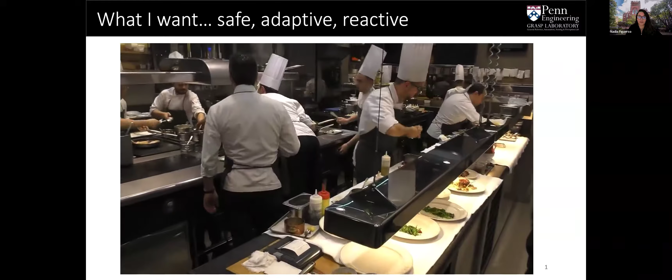If you can see, this is a very busy kitchen of a Michelin star restaurant where they're moving around, sharing workspace, getting in the way of each other, and everything still kind of moves fluidly. There's a lot of interaction.

Some people touch each other, some don't. Some try to avoid colliding. All of this processing is done in real time, it has to be done really fast. So if we want robots to be deployed in these types of scenarios, we need to think about how to make them safe, adaptive, and reactive, with that kind of real-time performance.

The other task or application that I'm really interested in is making robots that are actually useful for humans, physically useful.

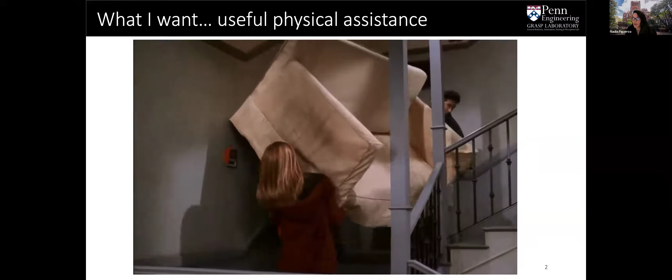I'm pretty sure some of the millennials know about this episode of Friends where they're trying to manipulate, co-manipulate this couch up a set of stairs. I didn't want to put the audio, but as you can see, they fail, but they try.

Even with humans, this task is very difficult. There has to be a lot of intention detection, figuring out what your partner wants when you're doing this collaborative task, when you have this limited perception. These are the problems that I'm thinking about all the time: how can we make robots have these types of capabilities to physically assist humans in useful tasks?

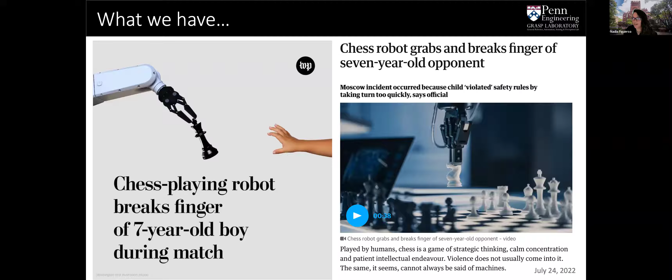But what we really have right now deployed are robots injuring humans. We see several articles online of a robot breaking the finger of a 7-year-old boy while playing a chess match, or robots severely injuring or killing a human in a factory when it's supposed to be in a very structured environment. And there are multiple of these.

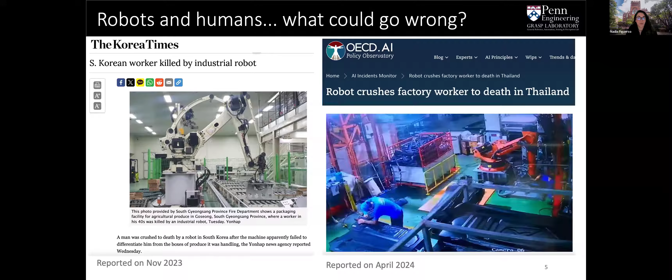So issues start coming up as time goes by, as people start deploying robots in human-centric environments, even in very structured ones, like a factory where there's supposed to be a lot of safety guarantees or rules. So that's exactly what we focus on in my lab.

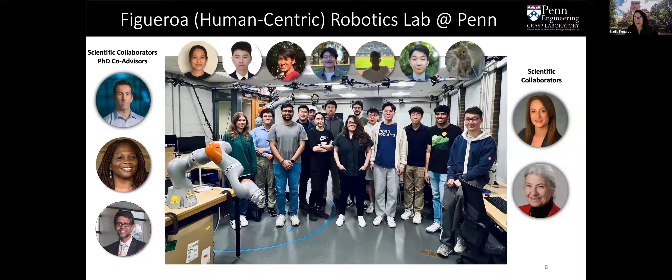In my lab, we want to do human-centric robot learning and control. Anything that the robot does in terms of control, how it learns, should always think about the human, that the human is going to be there. So how do we control and how do we learn for humans? The three things we're really interested in is fluid interaction.

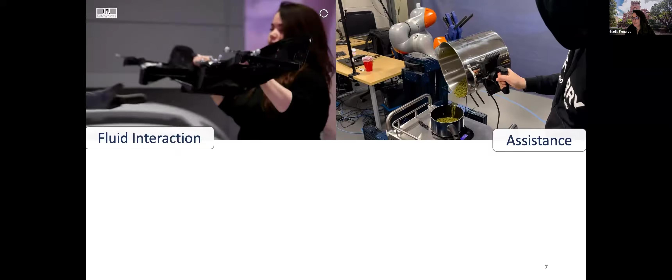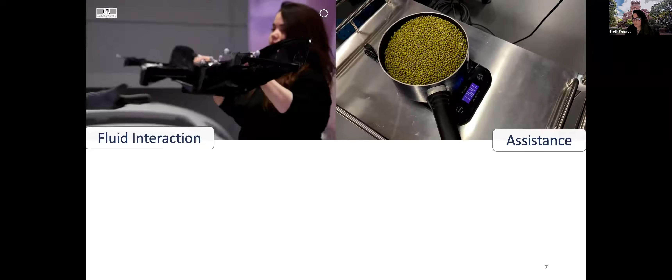Developing controllers or learned policies for robots that will fluidly interact with humans, like in this video where I'm handing over a large heavy object to two arms, being able to physically assist humans in everyday tasks, figuring out the intent, the collaborative manipulation intention of the human, and being able to provide the necessary force, the assist that's needed, applying a force, predicting what the human wants, and doing all of that in real time to perform the task with the human without making it more clunky or difficult.

And then, of course, we want to allow robots to be able to swiftly adapt to changes in the environment, changes in the task, or even changes in the user preferences.

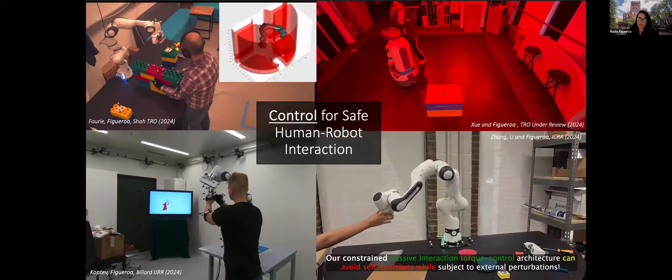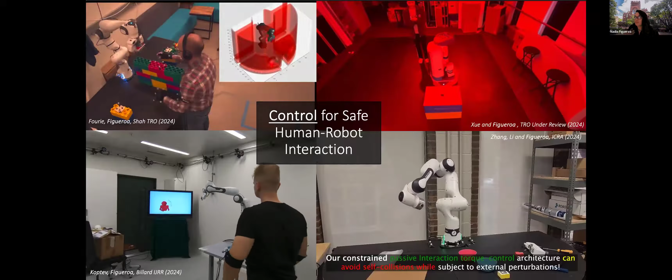Here on the left as well, directly avoiding colliding with a human, a complex high-dimensional articulated obstacle, or even going more at the low level, ensuring that if the human physically perturbs a robot, we ensure it doesn't go into self-collisions or joint limits while providing passive and compliant behavior. Those are some things I'll talk about more in depth later. I just wanted to give an overview of what we do.

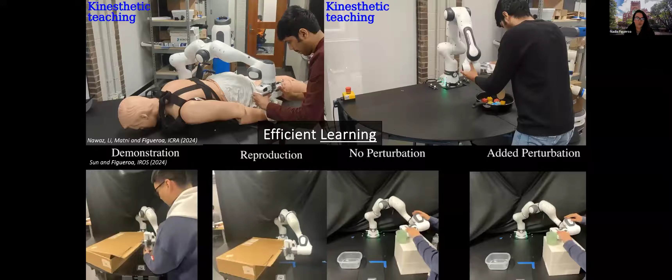And then, of course, there's the efficient learning part. From my point of view, what we want is really robots that can learn quickly, or adapt quickly from a human preference or a human demonstration with as little amount of data as we need to query from the human.

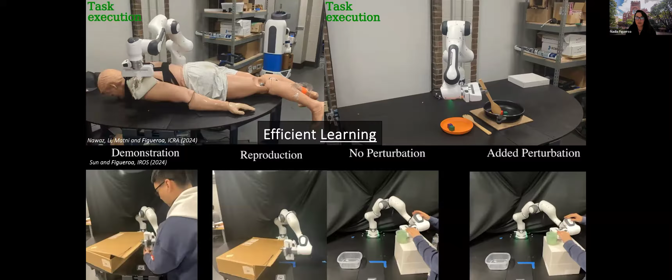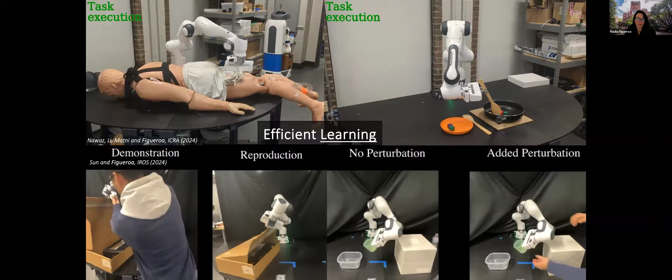My idea or intuition is that we don't want humans to provide 100 demonstrations all the time for different tasks. We would want them to provide the minimal number of demonstrations possible, and then have the robots squeeze as much information from that demonstration in order to perform the task in a stable manner, while being able to allow perturbations as you see in these videos. All of these videos were trained with one or a couple of demonstrations.

So this was kind of like the overview, and now I'm going to talk about how we do this. Before that, I want to take a little step back and really understand why our current robots, or the way that we control robots, from my point of view, is not thinking about the human at all. It's not human-centric robot control.

And that's why we have all of these incidents all the time, simply because the way we're controlling, our control pipeline, is flawed, has basically the incorrect objectives and requirements for robots that are actually going to be deployed in the real world with humans around them. So I'm just going to lay out what I call the traditional robot control pipeline, which I've had some backlash for from some people, but I'm fine. I think this is the traditional way of doing things.

You have some form of task specification, whichever you favor, at a high level. So you have some high level decision of what you want the robot to do. Then that high level planner gives, for example, a goal and maybe some constraints, X star and some constraints beta, to a motion planner that then creates the trajectory you want the robot to follow.

And then subject to some objective that you define, that is fed to a low-level controller that tries to track that trajectory. We normally only have feedback at this lower level, at the low-level control, where we send directly the torque inputs or velocity or however that robot is controlled, and we care about external perturbations or disturbances mostly at this physical robot level. But all of these other layers are somewhat offline.

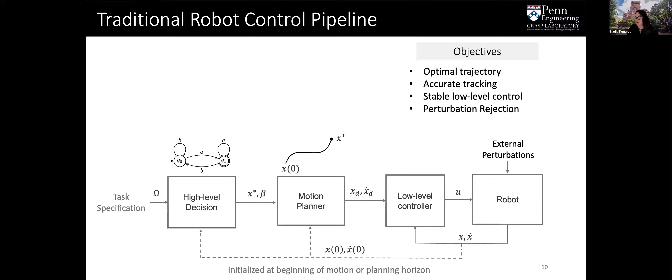So that's kind of like the traditional robot control pipeline. If we think about the objectives of this pipeline, they are generating an optimal trajectory, accurately tracking that trajectory as best as possible, and remaining stable or keeping stability of the robot at the low level control, and obviously being able to reject perturbations.

So if we think about these objectives, the assumptions of whatever system is going to be deployed with this type of pipeline is that if you deploy a robot with this type of control architecture, you're assuming that the humans will follow any safety rules that you tell them to follow. You're assuming that the human is not going to physically perturb the robot. And you're assuming somewhat that you have a quasi-static or fixed environment that you use to generate those high-level decisions and motion planning layer here.

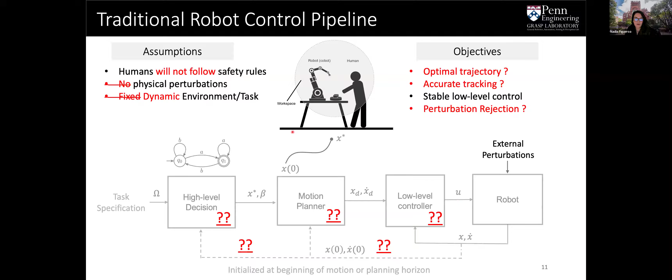So what should change? What should we do in order to make the robots actually follow these assumptions during their deployment? And so what should our control objectives be for physical human robot interaction? That's the first question. And how do we achieve them? So those are the two things that I'm going to answer in the remaining time of this lecture.

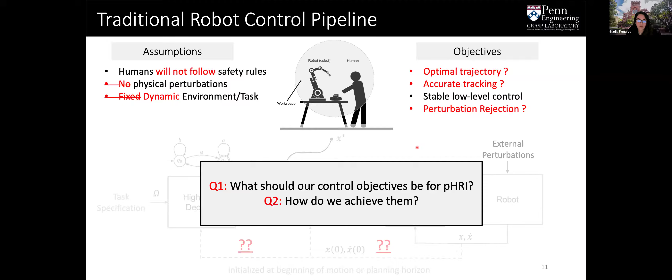So first of all, assumptions - I said humans will not follow safety rules. So what are the objectives? Even if the robot is tasked to just do a pick and place task, it should still have a reactive low-level controller that avoids the human or any agent that's coming into its environment.

We want robots to be able to handle human perturbations, because these perturbations can be either adversarial, like you see in the video here, where I'm just kind of pushing the robot around to stop it from achieving its task, which is releasing the block in the target.

But perturbations can also be intentional. It could be the case that the robot is performing a task and the human just wants to correct it quickly and say, no, don't grab this block, grab this other block, or don't polish this surface over here. And our robot should be able to allow the human to just come in, grab the robot and move it. And then the robot kind of adapts or infers what the human actually is doing, or wants, or is saying to change in the robot's task, without having a very difficult or complex layered architecture that deals with all of that.

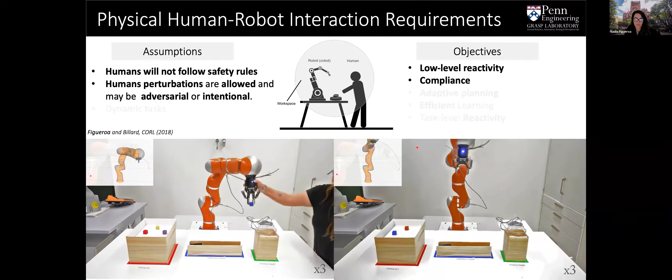This should be kind of natural in the way that we're controlling the robots. So for that, obviously, we need compliance. We need the robots to be compliant. And then the next one is kind of like dynamic tasks.

If the tasks are going to be inherently dynamic, then our objective is adaptive planning, not optimal planning. So it could be both, but from my point of view, the objective is more on the adaptation part than on giving an optimal trajectory in terms of time critical situations.

Obviously that's where you would need something like that. But in a lot of these adaptive tasks, what's more interesting is the adaptation to changes in the states of the world, of the human, and of the robot itself.

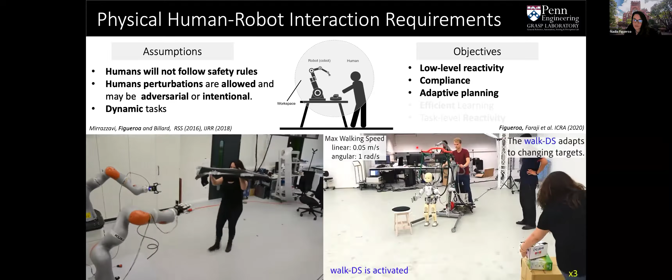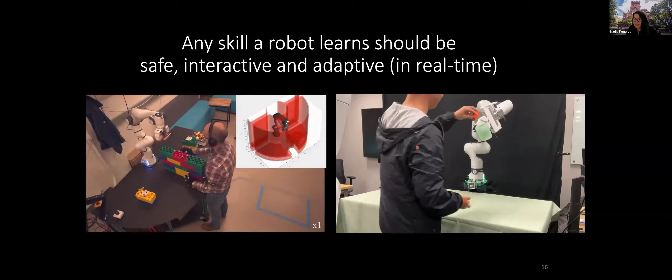So here I show some videos of what I mean by this type of adaptation. Basically, my main thesis is that any skill a robot learns should be safe, interactive, and adaptive in real time.

So how do we achieve that? That's our next step. Going back to this robot control pipeline, the only way we can really achieve this is if we start adding feedback into the higher level layers of our traditional control pipeline.

For example, in the motion planning layer, rather than generating a time-indexed optimal trajectory, what we need is more of a reactive feedback controller, a motion planner that takes the current state of the robot and is always adapting to changes in the environment.

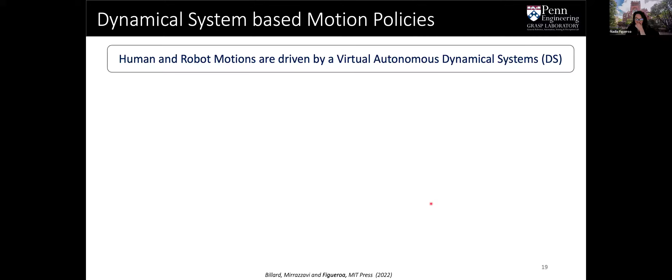To achieve this, this is the first chunk of theory or techniques we use. We assume that the human and robot motions are driven by a virtual autonomous dynamical system. So rather than representing the policy or motion generator as a function f of x that just gives you the next desired state or a trajectory, we define the motion of the robot as a dynamical system like this.

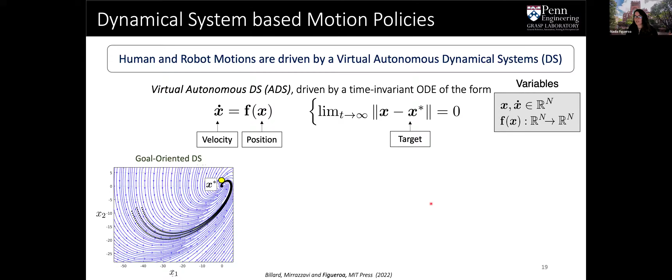Where x is the position, x dot is the velocity, and f of x is this vector field or flow that tells us, from everywhere in the state space, how the robot should move to follow that trajectory or reach that goal.

What's cool about this is if we formulate our motion policies this way, we can use control theory to ensure stability and convergence. We can apply Lyapunov theory and impose constraints on the parameters of this function f of x so these vector fields have no local minima, no spurious attractors, and no divergences.

So it will always bring you back to the trajectory or to the distribution of the data used to learn these dynamical systems. You can also enforce safety. Once you have a dynamical system, you can modulate it, you can reshape it.

So you can enforce safety through this boundary-based invariance idea, similar to control barrier functions. You can add a control barrier function on your state space, and then start modulating the flow or encapsulating the flow of these dynamics to ensure safety or virtual boundaries in the state space.

And of course, we can also apply even more advanced nonlinear control techniques like contraction theory, which we're exploring currently in my lab, to have even more expressive motion policies, like limit cycles, that don't necessarily follow or aren't expressible with a typical quadratic Lyapunov function. So that's one cool thing.

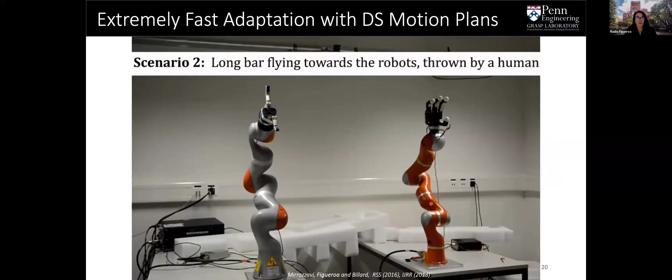But the other cool thing is that because it's just a very simple parametric function, we can do extremely fast adaptation with these types of motion policies. This was a work from my PhD with my colleague and dear friend, Sina Mirrazavi.

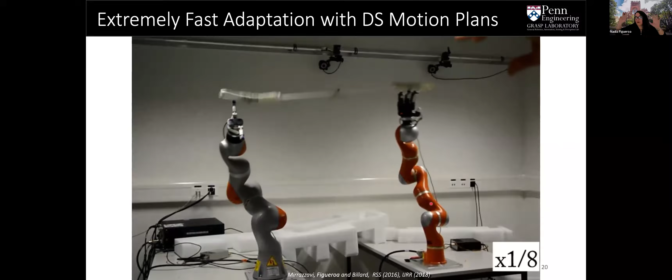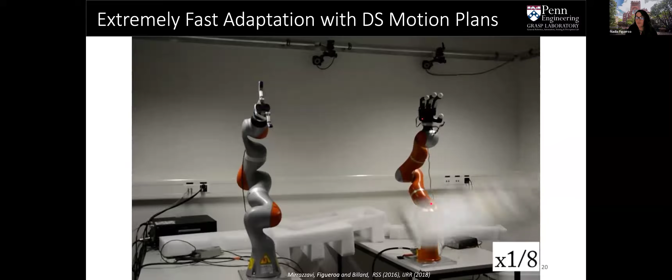In this case, the video is slowed down 8 times because we can throw this bar to the two arms, and what's driving the motion of the two arms is a dynamical system we formulated to track the position and velocity of the grasping points of these arms. So this shows that if we can learn or parameterize these motion policies with these guarantees, we can have really cool and reactive behavior at the level of a human or even superhuman level.

So it's kind of like a negative velocity feedback error. This allows, depending on how we formulate this damping matrix, the human to perturb the robot in different directions, orthogonal directions to the motion, or in any direction, depending on how we do it. But obviously, if we don't have a compliant robot, this will be a bit more difficult to do.

Not impossible though. We can have force torque sensors, tactile sensors put on the robot so that we can detect when there's a touch or contact, and then we can basically do this same type of behavior, but now with a non-torque control robot.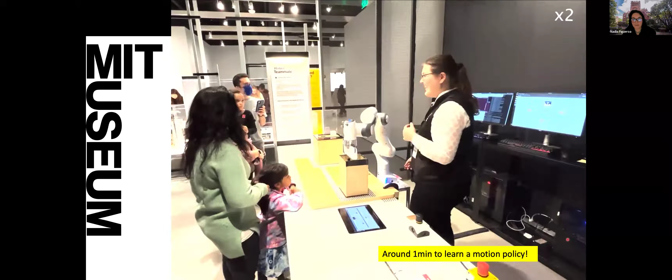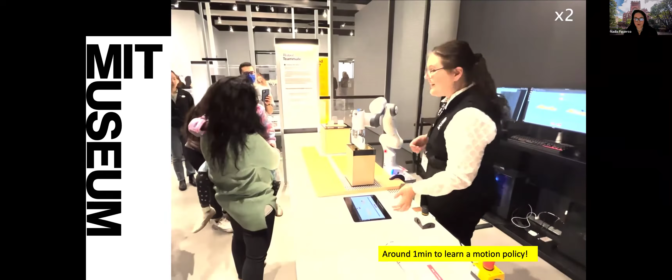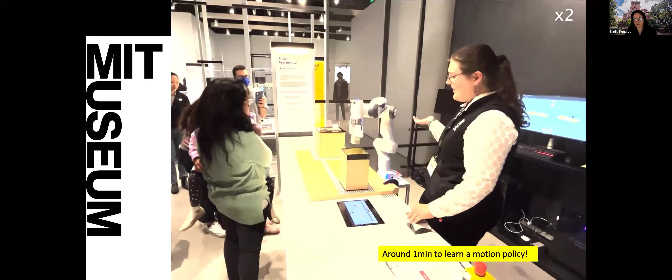To show how easy it is to teach these systems and deploy them, we have this method working in the MIT Museum. Here, one of the museum facilitators showed a museum goer how to teach the robot to do the task. While she's explaining what's going on, the motion is learned—in this case, in about 1 minute. Once learned, you can see that humans can interact very easily.

This ensures safety and compliance to physical perturbations, and also to the safety constraints. Now, one thing I glossed over a little in the previous slides is how to learn this mixture—how to figure out how many of these linear systems you need.

And we get some Gaussians that from the machine learning perspective seem okay because you have nice data coverage with a minimal number of Gaussians. But from our assumption that each Gaussian should represent a linear system, it doesn't work, because you end up combining trajectories that are actually moving in opposite directions. And then you end up with a dynamical system that doesn't perform well. It will converge because it's learning your system matrices with these constraints, but it will not be able to reproduce your trajectory accurately.

Very fast, so that we can now do incremental learning. In this case, for example, my student Sunan showed three demonstrations. We had three demonstrations, we learned the dynamical system, and this is running in real time, actually, this video. Then you can see the dynamical system was learned, and now we have the reproductions here, and he will now show that reproduction.

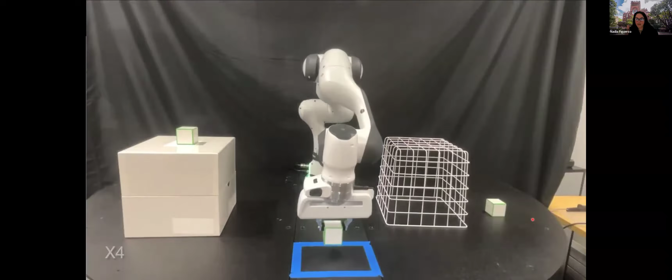And because it's a parametric model, if you add more data or more batches, we also have a very simple way of adding those trajectories to the previously learned dynamical system, and figuring out how many more parameters we actually need to add. And all of this is learned in real time.

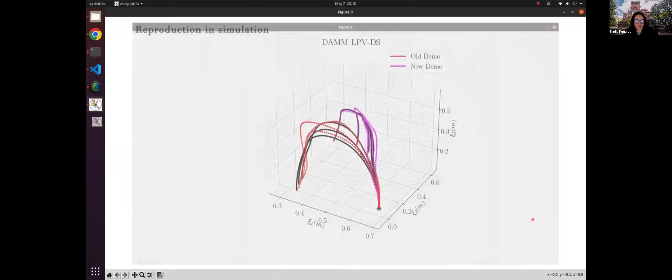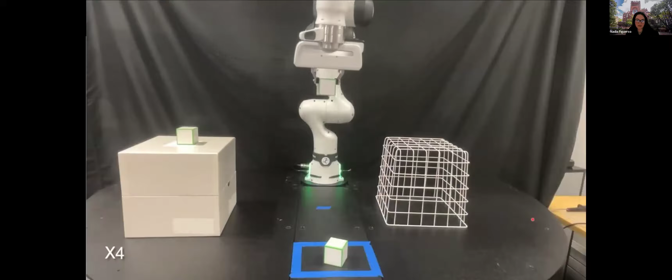So this video is just a screen recording of my student's desktop. As you can see, we do the reproduction in simulation, and then now the robot is capable of performing that new task. All of this is within a single motion policy, so we can incrementally build more complex trajectories and motion policies.

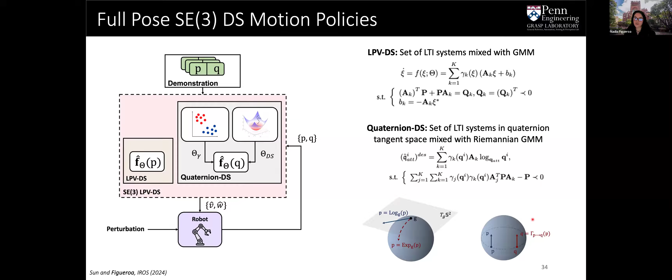Of course, one of the things is that all of the variables I have been using up until now are on X, so assuming Euclidean space. So we also have a new work that extends this idea of linear parameter varying dynamical systems, but now at the quaternion space. And then we combine it to have a full SE3 linear parameter varying dynamical system with a Gaussian mixture model that is in the Riemannian space of the quaternion, combined with position space.

And now we can also learn from a single demonstration the full pose dynamical system motion policies, as you see in this video. Here we can see a typical pouring task.

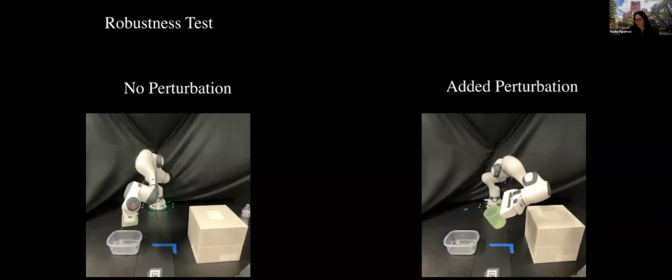So on the left is just without any perturbations. On the right, you can see that we can perturb it, but because it learned the flow in both position and orientation, it's coupled, so if we perturb it, it'll also correct its orientation. As you can see, that's a very useful task to have, and we trust it so much that we're actually pouring real water into the cup.

So of course, that's one way of learning these dynamical systems. We're also exploring different techniques, like a more virtual control approach, where for cyclical tasks, we use a neural ODE with a couple of demonstrations of this kind of cyclical, periodic task. We fit the neural ODE. One of the things about the neural ODE is that it encapsulates very complex dynamics nicely, but it still has that issue of spurious attractors and potential divergences. So what we did here was take more of a virtual control approach, and say, okay, we stabilize our neural ODE, which is unstable.

It's very accurate, very nicely representing expressive trajectories, but it will go into some weird spurious attractors if perturbed. So what we do is add this virtual control, which is very simple—this error. This virtual control is driven by a Lyapunov function on the tracking error of the trajectory, not with respect to a target or a global attractor, but with respect to your actual trajectory. So essentially, if you're perturbed, this virtual control will bring you back to that limit cycle or trajectory that was learned with the neural ODE.

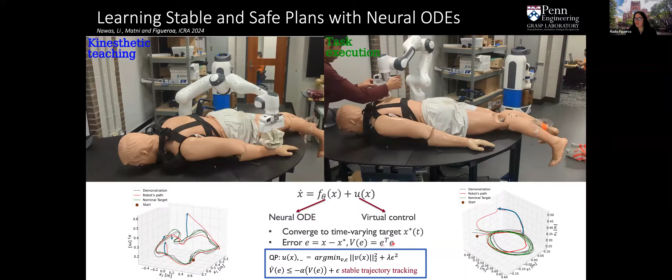And of course, because it's a quadratic program, we can add collision avoidance with control barrier functions. So it's very easy to start adding constraints and ensure all of these different guarantees.

We've also explored, in collaboration with colleagues from Bosch and Denmark, using contraction theory in the latent space—neural contractive dynamical systems. These are SE3 dynamical systems that we pass through an encoder, and in that latent space we ensure we have a contractive dynamical system following very simple contraction constraints, and then we deploy it. So we show contraction even in this latent space.

In that paper, we also have examples of how this works for learning motions of a full human, more than 16 degrees of freedom, also.

So all of this is cool, right? I showed you multiple ways how we go about learning these feedback motion policies in order to very efficiently get that adaptivity that we want inherent in our motion policies. But then, of course, there's one other component: these policies are learned on static data. So you give a demonstration, and it shapes your dynamical system following that demonstration, and it will only be able to perform that.

If suddenly your demonstration or task was all about going to a specific via point, or grabbing an object, or avoiding some part of the workspace, and those geometric constraints start changing, then you end up having to learn a new dynamical system—which is that whole idea of multimodal learning trajectories from different viewpoints, so that they can be generalizable and transferable.

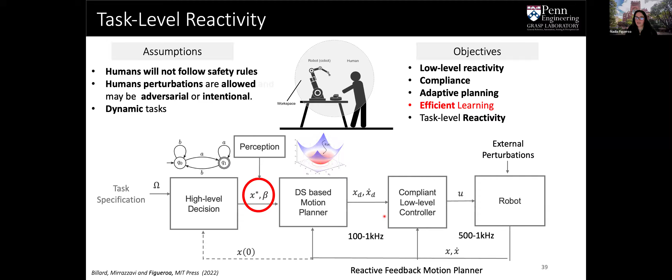So instead of having to give another trajectory from a different perspective or environment that represents the same task, and trying to learn this generalizable policy, we go about it a different way. We say, okay, we know from the perception system what these task constraints are—they can be frames, for example, SE3 frames that represent an object in the workspace, the target, the points of grasping an object, passing through a tunnel. All of these are objects that can be represented by frames—geometric constraints, or even directions of approaching. So we said, if all these constraints can be expressed as geometric constraints, couldn't we add that into our motion policy, so that when something changes in the environment, our policies or dynamical systems morph with the geometric change, instead of having to give another demonstration? And that's exactly what we did.

We presented this work last year at CoRL. We call it elastic dynamical systems. The whole idea is very simple. Here I show you an original policy that was learned from a single demonstration, shown with the Gaussians and the vector flow.

Now we add these green blocks, which are our geometric task constraints—this is where you pick, this is where you place, and maybe here it's a tunnel or a via point. If those geometric constraints change, then in order to morph our dynamical system, all we need to do is morph those parameters to achieve or be close to the geometric constraints we know are inherent in the task. So we manipulate that Gaussian mixture model—we created an elastic GMM, where the parameters of this mixing function of our dynamical system policy are the typical prior, mean, and covariance of the Gaussians, plus the geometric constraints. We added joints to connect all of these Gaussians, so now we have a kinematic chain of Gaussians.

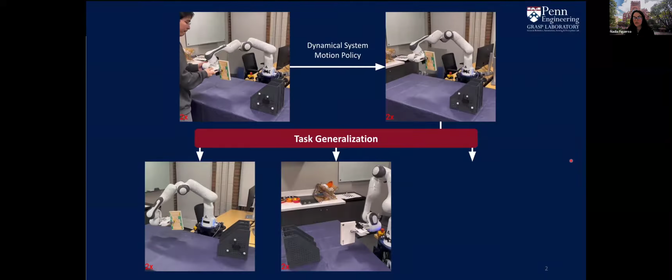So I can show you a video of how this works here. For example, here we give one demonstration. We show with that LPVDS framework, the original one, and then it deploys a task. And then now we change the orientation and position of the bookshelf in multiple ways, and you can see that what this method now adapts, right? What it's doing is reshaping or morphing the parameters of your dynamical system such that it now achieves the task constraints that you want.

So the next step was, can we do this adaptation in real time for motion policies, for task constraints that are changing in real time? So that's the latest work that we have right now, which we call EMP, or elastic motion policies.

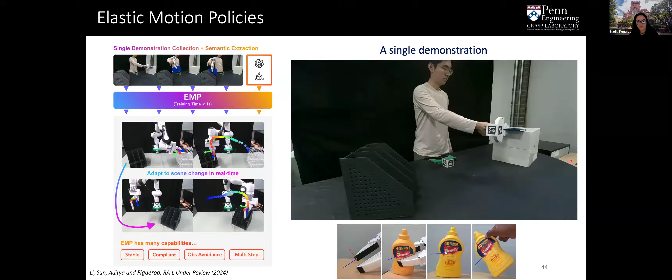So basically from a single demonstration or collection, here now we start introducing more perception, right? So we track the UMI gripper, we get the demonstrations directly from the human. We also use a large vision-based model to tell us the segmentation points, and we track the objects of interest. Initially we were doing everything with a motion capture system, and now we're using an actual perception system. Because of our advancements computationally, we can adapt these, or morph these elastic dynamical systems, in real time.

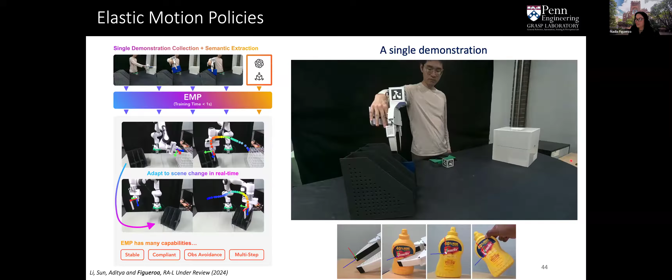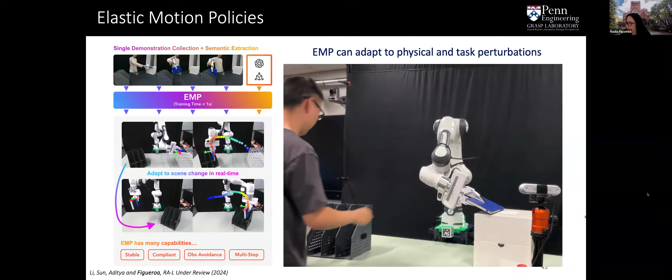As you can see here, the EMP can adapt to physical perturbations, as we've shown before. It performs the tasks nicely. So here we're perturbing it, we bring it back to another state, and then we change in real time. We're just changing the target, and it immediately recomputes your motion policy without having to give any new data, right? The whole idea is that the policy itself already has some notion of what the task constraint is, which in this case is the bookshelf pose that we're tracking using foundation pose. As you can see, the RGBD camera there, and the robot is capable of performing this, is capable to adapt to them and perform this very nicely.

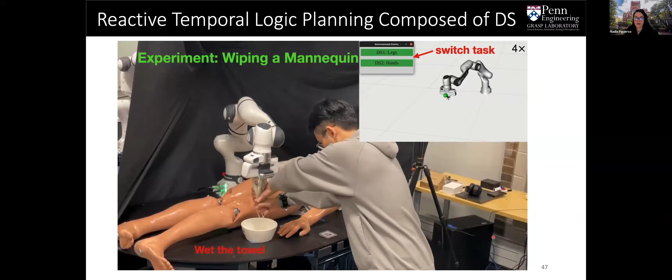So we have other things, of course. The idea is all of these tasks that I've showed you are kind of like single tasks, which you can think of as action primitives or policies that are expressive enough but are not multi-step long horizon tasks. But because each of our dynamical systems have convergence and stability guarantees, we can easily fit them into a high-level planner, for example, linear temporal logic, or this is a work that we just presented at IROS, reactive temporal logic planning, where what we're doing is composing these dynamical systems, integrating with perception, and then being able to switch between systems depending on the state of the world or the state of the human, and the human comes in and starts changing things up, right?

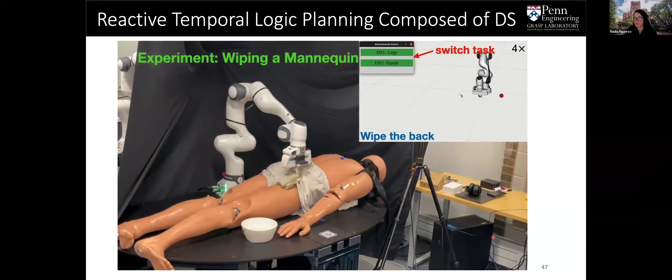Start changing the task. So here in this case, we have that, and then we can also, here is another example of just having a very nice composition of motion policies.

So one thing that I haven't mentioned, up until now it's all about learning, right? So how do we ensure then safety? I've mentioned this before. So learning, and then we can also even feedback at the high level decision, which is what this elastic framework is doing, is changing the target and changing the task constraints of our motion policy so that it's adaptive. So in this case, what we're doing is also feeding back some states, some information about the state to the high level decision maker. In this case, a very simple automata that we did for EMP, but then we're also exploring LTL in order to do that switching, to figure out what's the next dynamical system to use. But if we have this feedback at all these levels, then that's exactly how we can ensure the reactivity at the task level, at the motion level, and even at the low level, right?

So in terms of safety, I'm going to go super quickly over these. I mentioned this before.

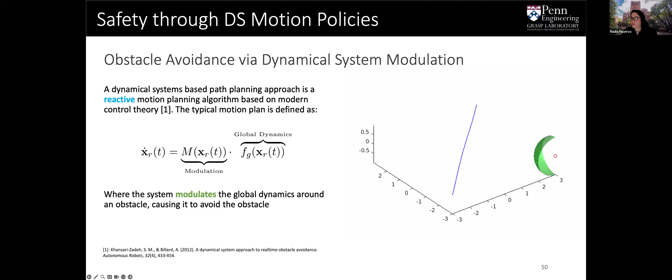When you have a dynamical system, it's very easy to modulate it. If you already have learned a function f of x, and you have some representation of the obstacle, you need a continuously differentiable function that represents your obstacle. You can essentially reshape your velocities, reshape your vector field. This type of work is inspired by harmonic potential functions from artificial potential functions, but in this case with constraints, like guarantees of convergence, and at least not having the least number of local minima as possible, which is all of these reactive methods actually do.

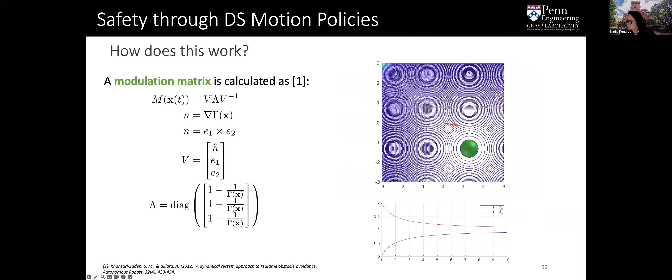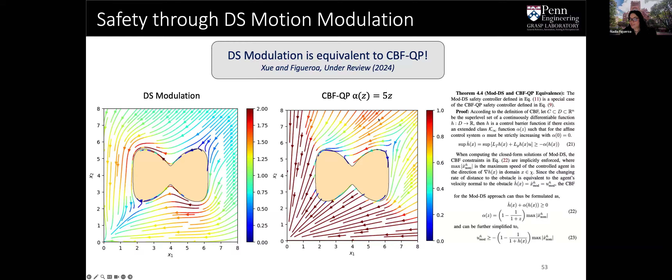One interesting thing is that this type of boundary modulation, of vector field modulation, is actually very similar or equivalent to imposing a barrier function, which is something we've shown in a recent work from one of my PhD students: if this modulation, where we construct a matrix that locally reshapes your vector field such that it follows the border or boundary of your system, it's essentially performing the same thing that a control barrier function performs. We have a paper under review where we compare them, and we actually have a new approach, which is a combination of modulation and control barrier functions to remove any local minima from any type of obstacles, because one of the issues is having very non-convex complex obstacles.

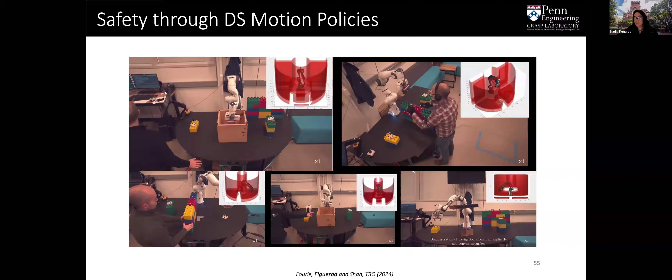This is what we are seeing here. This shaded region, the red shaded region, is a single boundary function that represents the workspace limits and also the human constraints, the human in the task. You can see we can do this modulation very quickly. So the whole idea is, if we have a good representation of our boundaries, then we can reshape our learned dynamical systems to be safe and also converge and achieve the task that we want.

So this is what I'm going to go into next.

This can be extended very easily to joint space as well, and we have done this, where we can easily sample from the joint space of a single robot, of a humanoid, or of multiple robots to learn a boundary function. So we learn a self-collision boundary function from that offline data, which is something I did during my PhD as well. Then we can use that as a constraint, for example, in a quadratic program for IK. If you look at this constraint here, this is essentially a control barrier function.

But then it can also be used in a dynamical system kind of perspective. Here's just some videos showing a quadratic program inverse kinematic solver with these learned self-collision constraints. Here we show it for the humanoid robots. And then we went one step further and said, what if we learn the boundary function of the robot with respect to external collision?

External obstacles. And that's exactly what we did in some recent work as well, where we sample the 3D space around the robots. Essentially what we're doing is learning this signed distance function. This is a neural network where the input is the joints, the joint angles of the robot, and a 3D point in the space, and what we get is this very beautiful, continuously differentiable boundary function that we can plug into any of our reactive controllers, which we did in this paper that we published in IJRR this year as well. It's a combination of MPC with modulation directly in the joint space.

So one last thing that I wanted to note, or how are we on time? Because I have 15 minutes, but done. Let me see.

Okay, I'll jump to this one quickly. So the last point I want to talk about is very recent work we presented at RSS this year. All of this pipeline, these objectives we're achieving with this way of learning and modulating and ensuring safety, they work if we know what the task is beforehand. If the robot was given training data, we gave it a specification, like the LTL specification of the task, and the multiple dynamical systems were already learned. But what if the task is unknown or undefined to the robot?

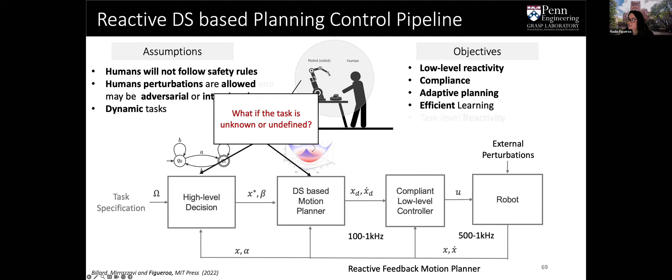This comes to a type of task where, let's say, we want the robot to physically help a human lift a heavy object or co-manipulate it. In this case, the robot has an idea that it needs to move this object probably to some position and orientation, but it doesn't know what that position or orientation is. It also doesn't know how fast or slow the human wants it to do this, or how much force it needs to apply.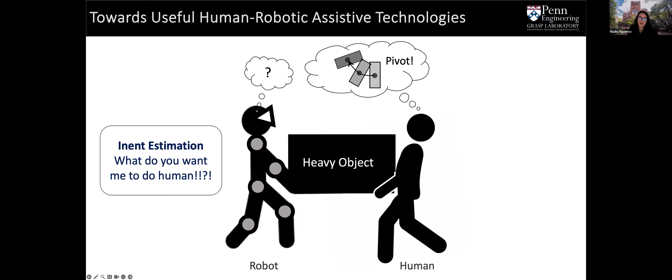So here, that's where the intention estimation problem comes into play. The robot has some idea, has a structure of the task, but doesn't know exactly what the human wants. This is what we did in this latest work.

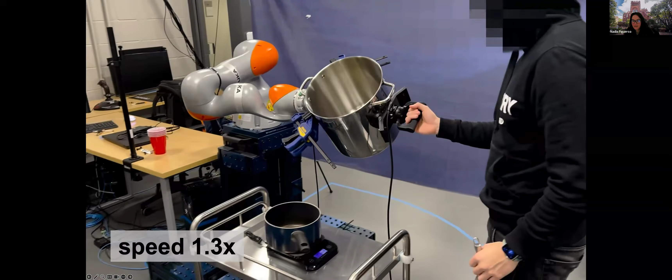In this video, the robot is computing, or estimating in real time, the position and orientation of a very simple linear dynamical system that helps you move objects around in 6 DOF, so 3D position and orientation, which is what we call here the task dynamics.

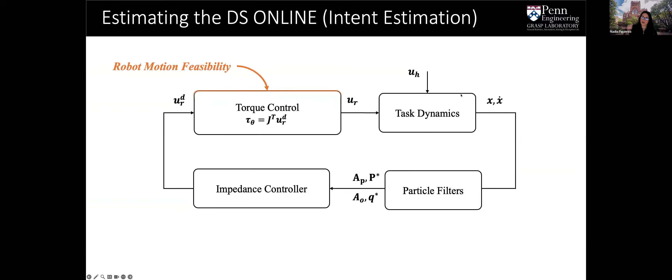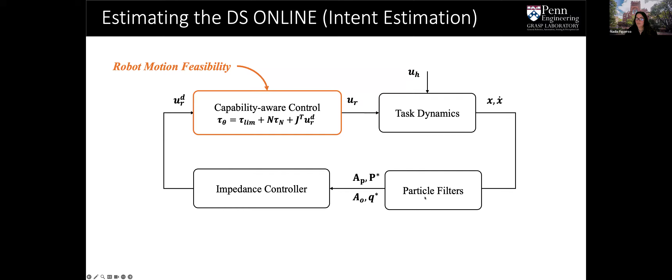Based on if the human starts perturbing or pushing, the robot starts estimating in real time a linear dynamical system, similar to what I showed before, like this A matrix, but now one for position and one for orientation, just to see if this worked, using a novel particle filter that we created, where the states of the particle filter are actually these parameters, the targets of the dynamical systems and the linear system matrices.

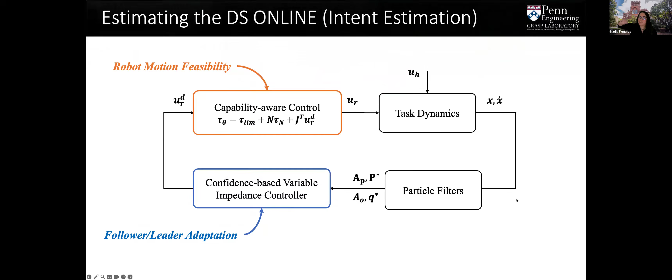The particle filter gives us confidence about those estimates, which we then feed into an impedance controller that modulates its force based on how confident it is about its estimate. So here you can see that working in real time.

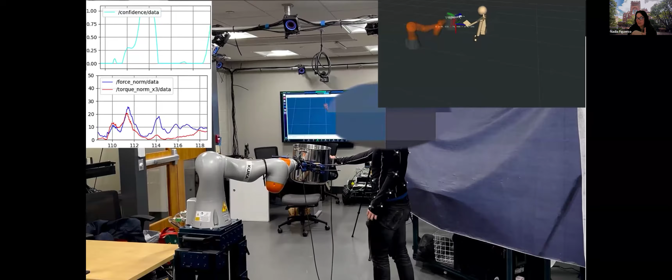These frames at the top, we created a game where we're telling the human to move the pot to this position and orientation, and the robot has no idea. The robot is just following the physical force, with its own proprioception, figuring out what is that desired position, orientation, and dynamics that the human wants it to perform.

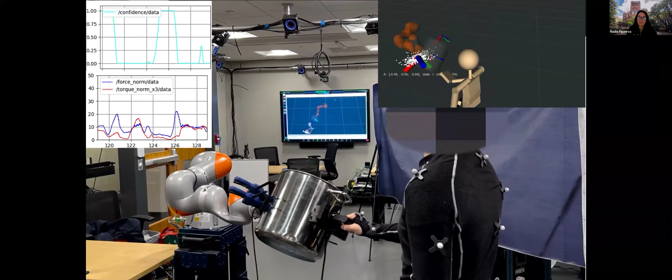In this case, we're actually not using force torque sensors, because since it's a torque-controlled robot, we make it a little bit compliant, so as soon as the human starts pushing, it uses its own proprioception to estimate this. Typically this is done with admittance control, where you have the force torque sensor and translate those forces to some velocity, but that's very impractical—we would have to have force torque sensors on any handle of any object.

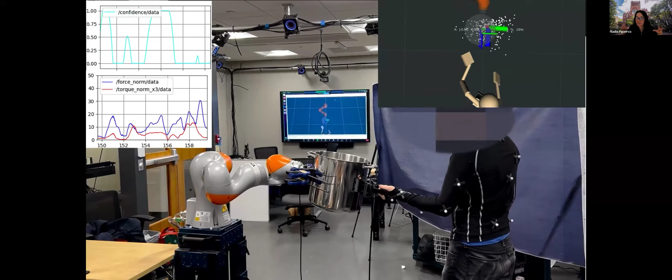So we wanted to see, can we do this with a dynamical system perspective, where the robot is estimating what the human wants, and that estimation is the parameters of a very simple linear system. These are the new threads of work that we're working on in my lab: intention estimation. Can we learn these more complex dynamics or motion policies or intentions from humans in real time?

One thing that's interesting is that when you're interacting with a human, there are two things the robot should know: what is the intention, and what is the capability of the human. Can the human actually perform that task it wants to do, like lift, so that the robot can then give you the proper force that you need.

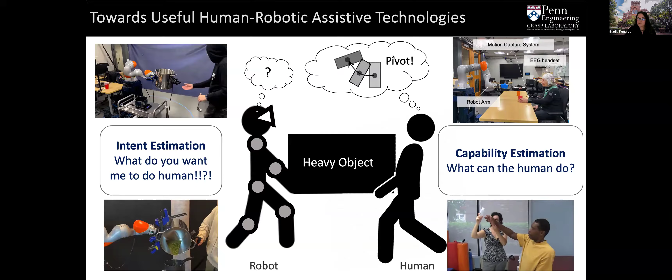So in that case, we're looking into wearable sensors, using EEG, EMG, and ultrasound sensors on the human to see if we can also detect the capability of a human. Because now we're thinking about, what if we want robots to help people with muscular disabilities or elderly people lift things and do these physical tasks? In those cases, we need to also understand the capabilities of these humans. So that's just something I wanted to mention, things we're exploring.

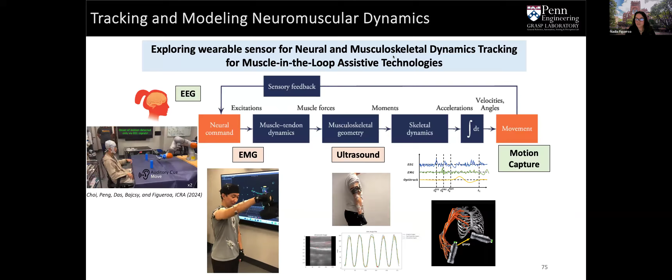And of course, we need to do all of this processing in real time. So this is kind of like a muscle-in-the-loop assistive robotics application.

This is what we're really interested in my lab currently. And yeah, so that's everything that I wanted to say.

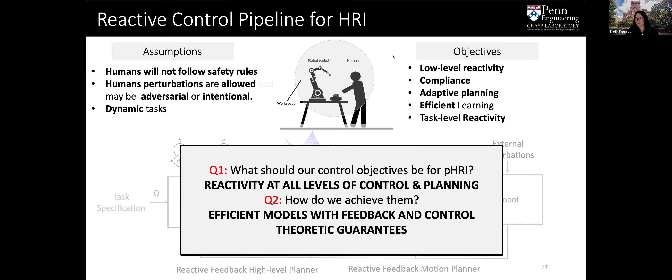So basically, the two questions I posed at the beginning of what should our control objectives be, my answer is reactivity at all levels. You want to be reactive at the control, at the planning, even at the perception level, which is something we're looking at. I didn't have time to present what happens if your perception is faulty. You should be able to be robust and react to that as well, because these are safety critical tasks when you're interacting with a human. And how to achieve this, obviously, with efficient models, with feedback and control theoretic guarantees.

So I wrote a book about all of these ideas with my PhD advisor Aude Billard and Sina, my colleague. It's online. For those of you at MIT, it's there at the MIT library or the MIT Press. We're going to release it soon. We have a website for it as well. And yeah, that's about it.

And I want to just mention all of my wonderful students and collaborators at Penn, and still some collaborators that I work with at EPFL and MIT.